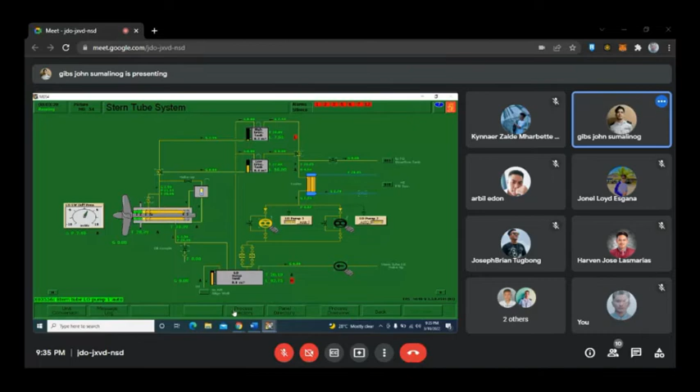Then open this stern tube seal, and set this pump to auto. Back to process directory, and go to steering gear system.

Click, then close this bypass valve, also this one. Then start steering gear 1, both pumps, and steering gear 2 also. Then close the schematic valve block.

Now this is the rudder control. Click starboard, and we'll wait until it reaches 35 degrees. Once it's reaching 35 degrees, we can click the port side. As you can see, this rudder is turning. It's already at 35 degrees, so put it in port side, click the port side. It's working.

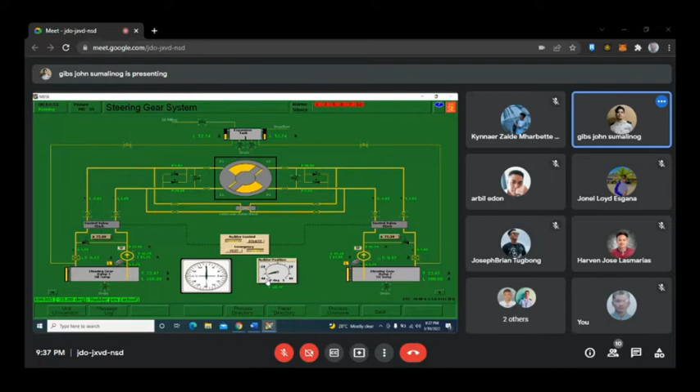If it's at 35 degrees, go back to starboard, then close if it's at 0 degrees or center position, the rudder pauses. Just wait until it reaches its center position or 0 degrees. It's at 0 degrees, so stop, neutral position.

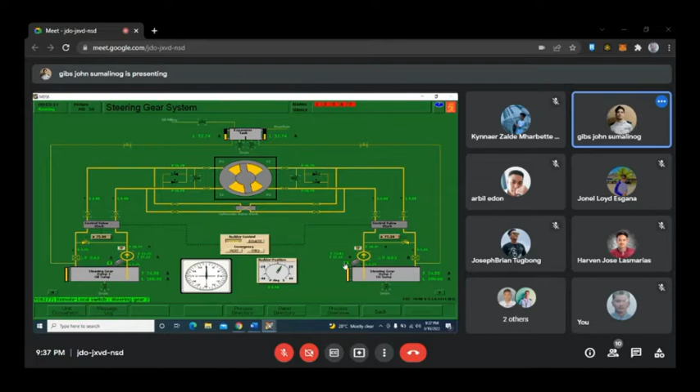Then we set this pump into remote, this one and this steering gear. Back to process directory, then lubricating oil system. As you can see, it is now at level 0.84. We can close the makeup pump or the valve.

Back to process directory, then go to main engine local control. We can engage now the turning gear, then start, engage, then start. Then back to process directory, then go to the fuel oil system.

As you can see, this is the supply pumps and the circulation pump. We need to start the supply pumps. Start, and this one. We'll wait for the system to run.

As you can see, it's now running. Now we can put the system into remote, as well as the circulation pumps, remote. There's an alarm, so we need to acknowledge and then silence. Then turn on this preheater, so that our system will heat up, and we can also open this valve, the supply valve.

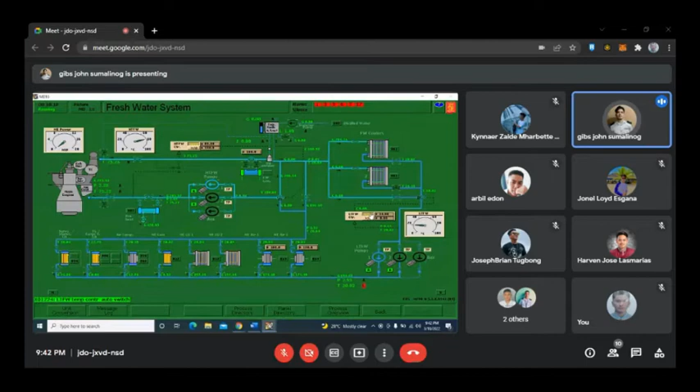Since both pumps are open, we need to wait until it's stabilized. Now we can close the auxiliary pumps and then set the pumps to remote, both pumps. Then open this valve, the bypass valve. Then HTFW to auto and also the low temperature LTFW to auto. Back to process directory.

Now go to the fuel oil settling tanks. As you can see, our water is now at zero. We can close the valve. Back to process directory.

So go to the start air system. Drain the water that is present in this one, also this one. So now we can close.

Open the valve in this line to the maneuvering system, or the main engine starting air system. Open this valve, this one, and close this valve. Open this one.

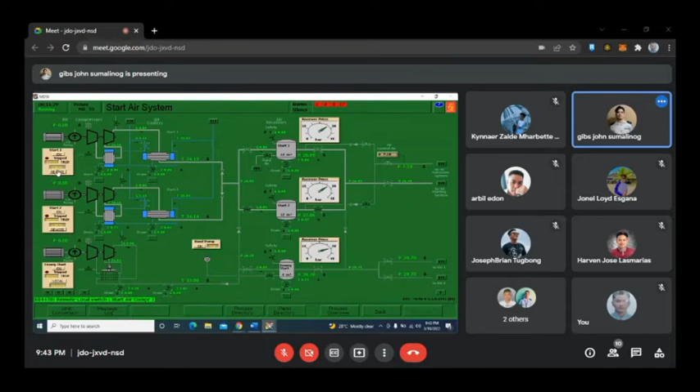Afterwards, we need to set the pumps in remote control. Remote. Back to process directory.

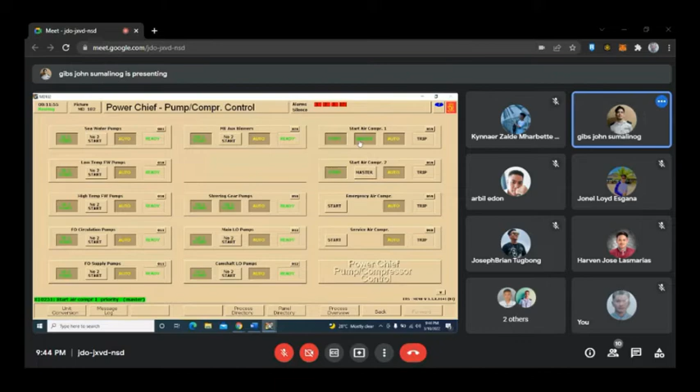Go to the panel directory, then go to the power chief pump control. Then set all the pumps in auto. Sea water pumps auto, low temperature pumps auto. Then press master. Back to process directory.

Then go to the start air system. There's an alarm, just need to acknowledge.

Silence. Process directory, so go to service air system. There's an alarm, acknowledge. Just need to acknowledge, so this one.

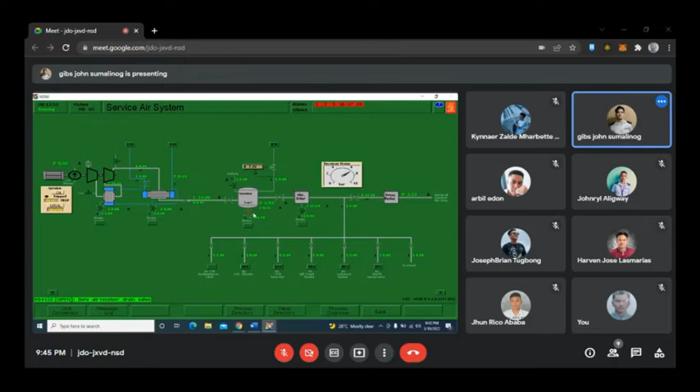Silence. Then go to the service air system. We can open this one, also this one, and this one. Just need, so it's good, zero, and then it's zero. So we can close, just need this one too. So it's closed, so it's now okay.

Back to the process directory. Then go to the maneuvering system. In this main engine local control, we need to put it in local.

Then start air block valve open, safety air valve block open, and the air distributor block valve open. Then set to remote the main engine local control. Back to process directory.

Then go to the main engine local control. So it's already in auto. There's an alarm, acknowledge. Silence. Just acknowledge.

All the pumps, hydraulic pumps on, and then go to the process directory again. Then mooring winches, then on, then start, start, start, start.

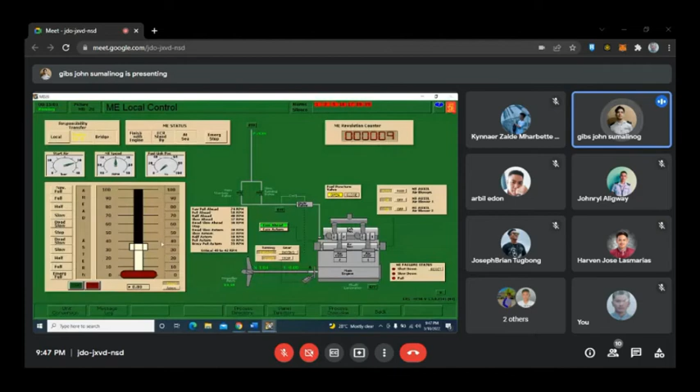Disengage, stop, disengage. Then back to process directory.

Then click the panel directory, then go to Auto Chief main engine control. As you can see, there's no alarm. So we can start to slow turn.

Click the slow turn. In 10 seconds, we need to count: 1, 2, 3, 4, 5, 6, 7, 8, 9, 10. So now we can close. There's an alarm, just need to acknowledge.

And close. We go to process directory. Now go to the main engine cylinder number 1.

So we need to close all the indicator cock valves, close all. We need process overview, and as you can see, there are 5 main engine cylinder valves.

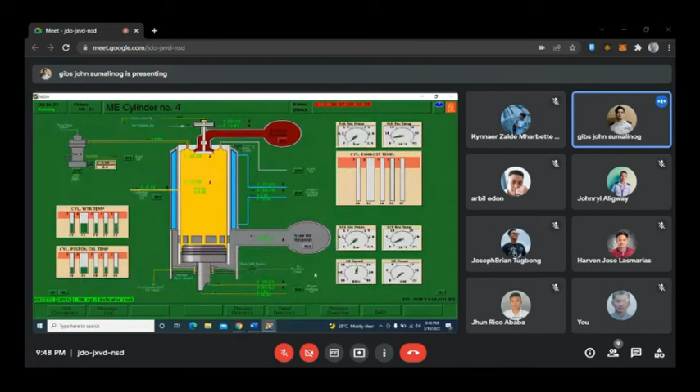Close this, close, back, close, process overview, close the indicator cock valve. Also this one, close. It's now okay. Back to the panel directory.

Silence. Go to, and then 104 main engine control. Click, and then we need to check. We need to test.

As you can see, it's working, and the indicator that shows it's working is the ME RPM command. The number is 0.87. There's an alarm, acknowledge. Silence. Then put it back to 0.

So in astern, we need to test. There's an alarm, silence. So it's running, as you can see the indicator, it's working. So put it back to 0.

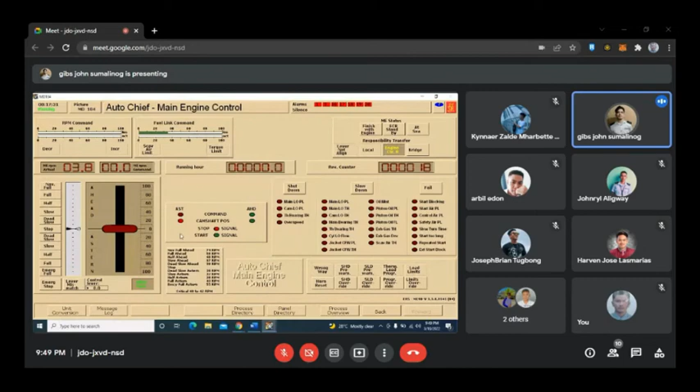And then the next step is we need to transfer the command to the bridge. So click the bridge.

And then after clicking the bridge, go to panel directory and go to the main engine bridge control, and accept the command. So now we are accepting the command. We can now take over the command.

So we need to test the system. It's working, it's 10 points. Back to 0. As you can see, it's running also, the indicator is running.

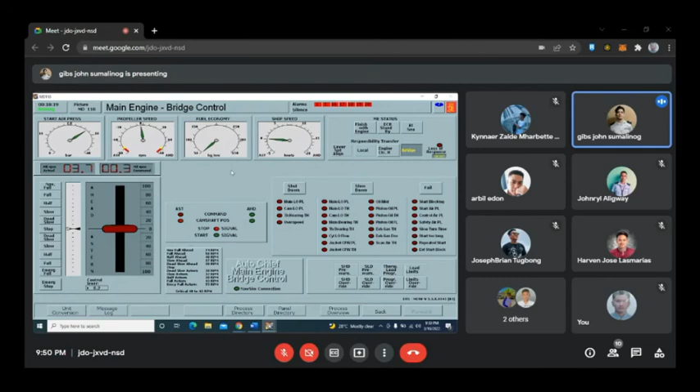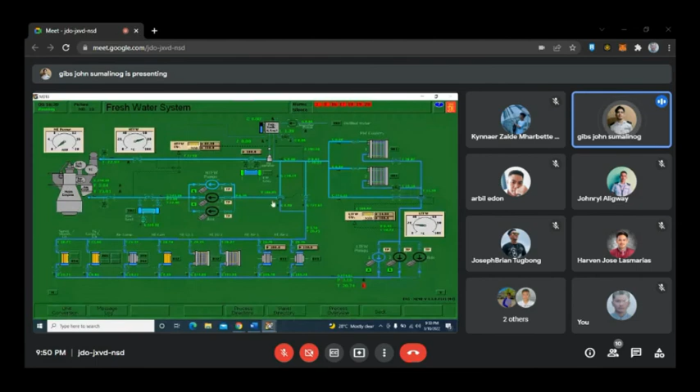So now we are done. Let's check every system. Freshwater system, so there's no alarm. Process directory to fuel system, so everything is done, guys.

So we need to wait for a while since we are given 20 minutes to perform this assessment. So let's check every system. So it's okay.

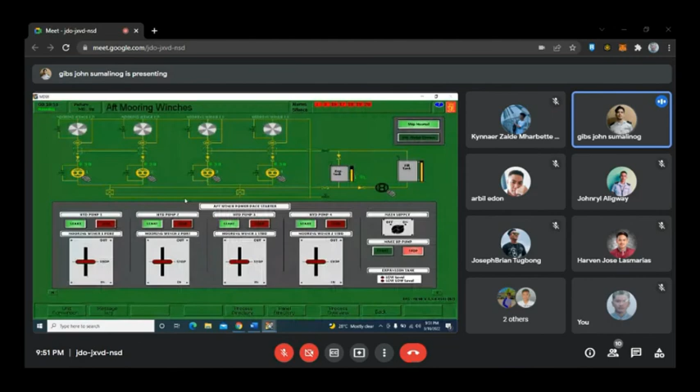So wait for a while, guys. There's an alarm again, acknowledge.

Your 20 minutes start time has been fully consumed. So to exit, just click FN F3. So we're done.